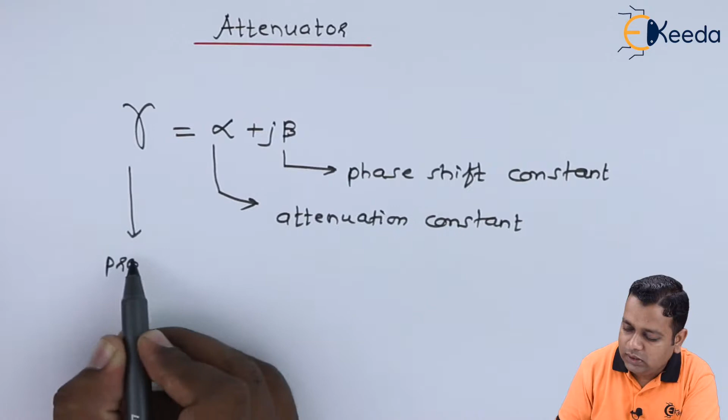These are basically beta, as in the previous topic we addressed with phase shifters. Beta accounts for the phase shift constant, whereas alpha accounts for the attenuation, and this is called the attenuation constant. So the attenuation and the phase shift together govern the propagation of the signal, this is called the complete propagation. Hence, gamma is called the propagation constant.

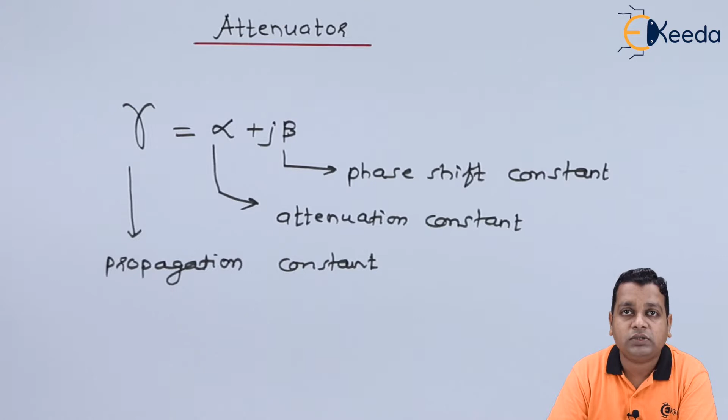Now we have the topic called attenuator. The attenuator is a microwave passive device which will attenuate the microwave signal propagating through it. The extent of attenuation can differ. It can be complete attenuation, so that we call the device a terminator. If the complete microwave power is absorbed by a certain resistive-type dielectric material, it acts as a terminator, and when a certain percentage of microwave power is attenuated, it is a general attenuator.

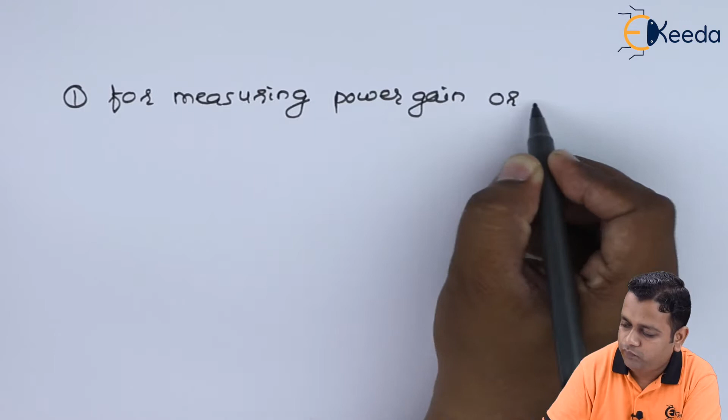Now there are different purposes to have attenuation in the microwave test bench. The first purpose is for the measurement of power gain or loss, most possibly in terms of decibels. The second intention to use attenuators is for providing isolation between the instruments or components.

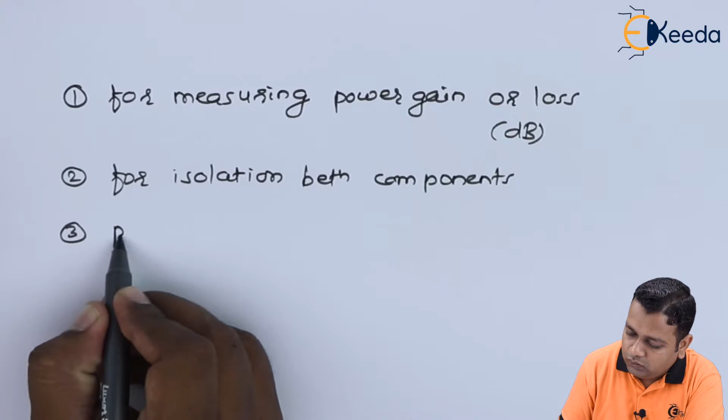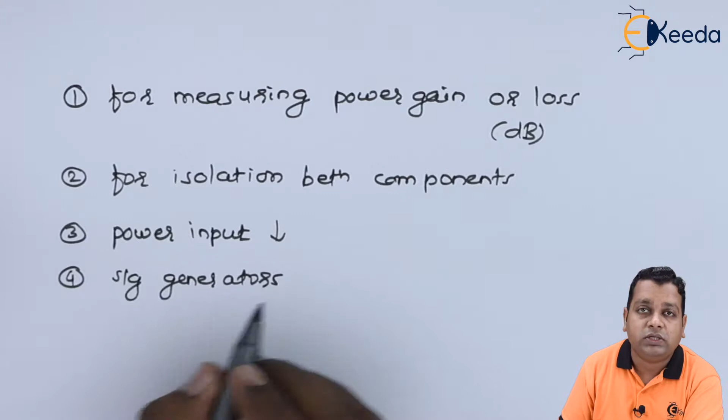The next purpose is for reducing the power input to the intended device, so the power input can be in a controlled manner with the help of the attenuator. And the fourth purpose is for signal generators. Signal generators are of two types: microwave tubes and microwave signal generation on semiconductor platforms using the negative resistance principle. With the help of the attenuator, signal generators are provided the means of calibration for their outputs at the accurate or precise level.

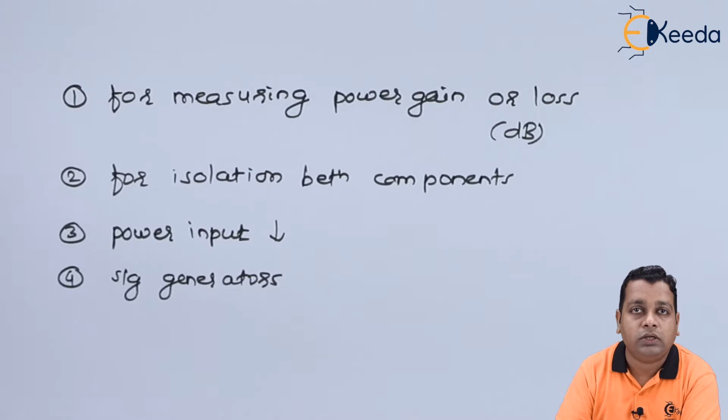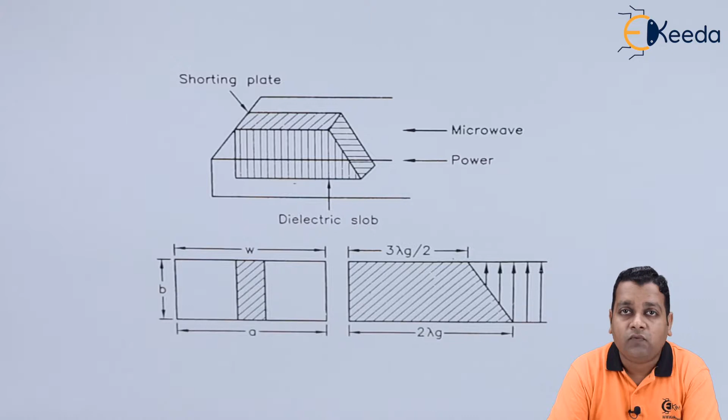So these are the intentions for using attenuators. Now, we discussed that there can be two types of attenuators. The fixed attenuators, in which the assembly has components at fixed positions, and a fixed percentage of microwave power can be absorbed, resulting in attenuation, a kind of loss in the power. On the other hand, if we can have a variable amount of power attenuated, the attenuator is called a variable attenuator. In this diagram we have the fixed attenuator.

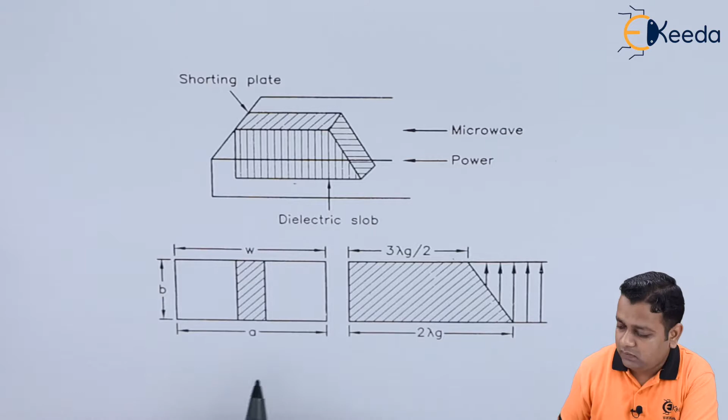The three-dimensional view of the fixed attenuator is shown in the uppermost diagram, where a section of rectangular waveguide is shown, and in the hollow space inside the rectangular cavity, we have a shorting plate at the end, and a dielectric slab which absorbs the microwave signal or microwave power coming from the other end. The dielectric slab exhibits pure resistive nature, which makes the absorption possible.

Now to look at the two sectional views here, if you see the front view, it will have this kind of visualization, where the dimensions of the rectangular cross section, small a for the broader and small b for the smaller, can be represented, and in between there will be a centrally placed dielectric slab, so that the power absorption can be made.

Now the rectangular waveguide cavity has not been completely filled up by the dielectric slab, but a certain space has been covered because of this dielectric slab. Hence we can say this is the fixed attenuator.

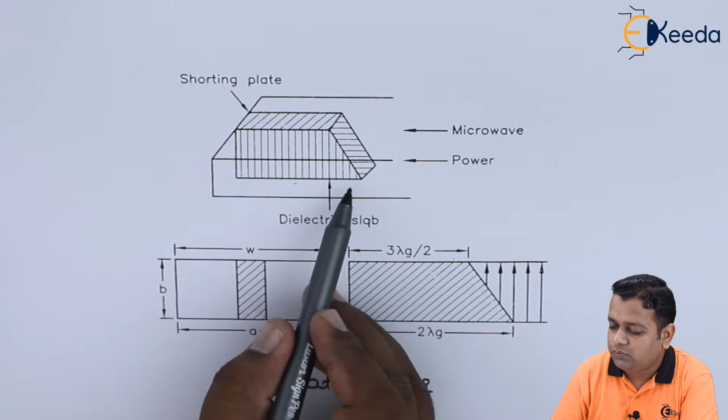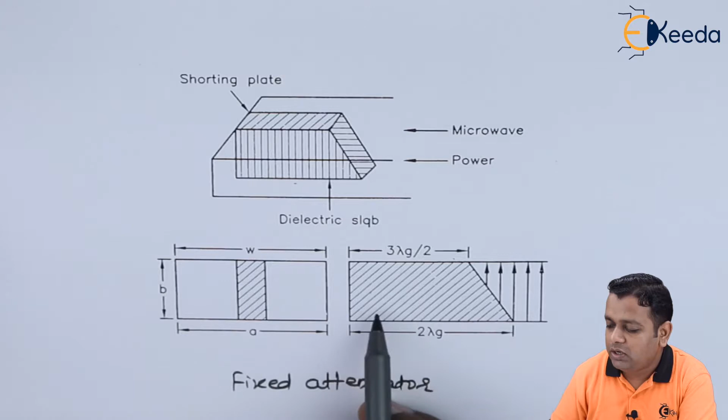To see the side view and this particular shape, the tapering is most possibly done so as to reduce the reflections. The side view will represent such a shaded dielectric slab, which has a shorting plate at the end.

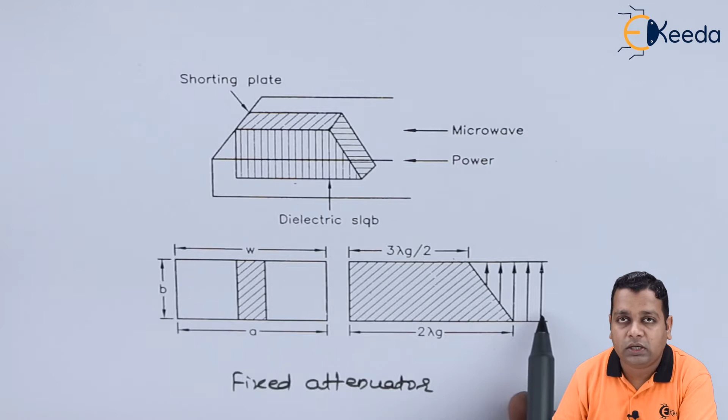Whenever the microwave signal is incident onto the dielectric slab in its particular journey, originally we have the orientation of the E field vector like this. So finally, going from bottom to the top end up to this dielectric slab, there will be vanishing of the E field vector, so the absorption of the microwave power can be made possible.

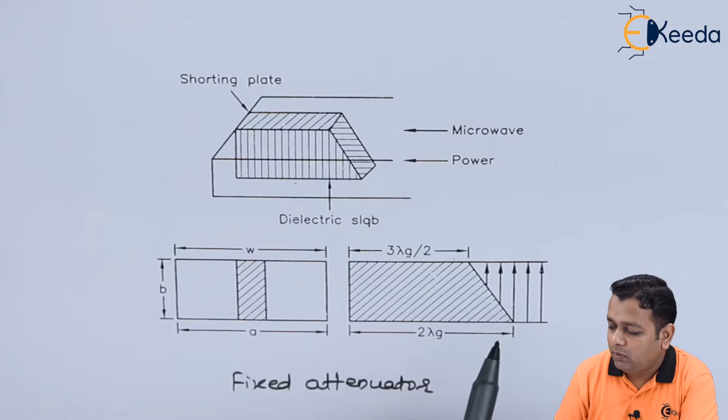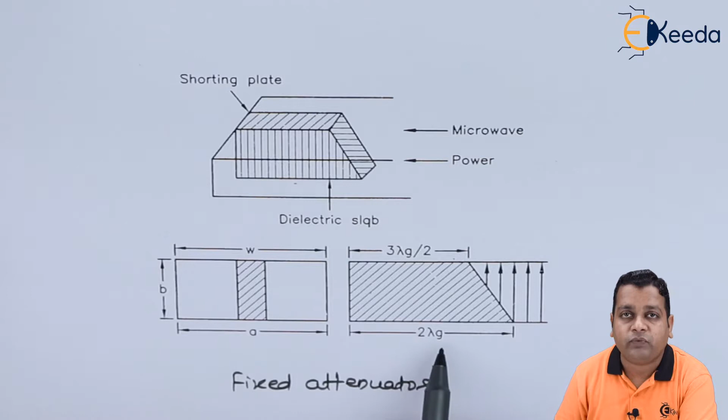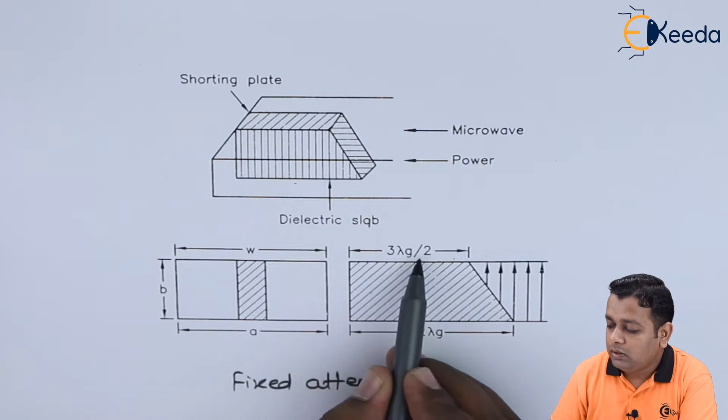To talk about the generalized dimensions, most possibly the bottom length of the dielectric slab is taken as twice lambda suffix g, where lambda suffix g is called the guide wavelength, whereas the top length of the dielectric slab is kept to the proportion of 3/2 times lambda suffix g, the guide wavelength.

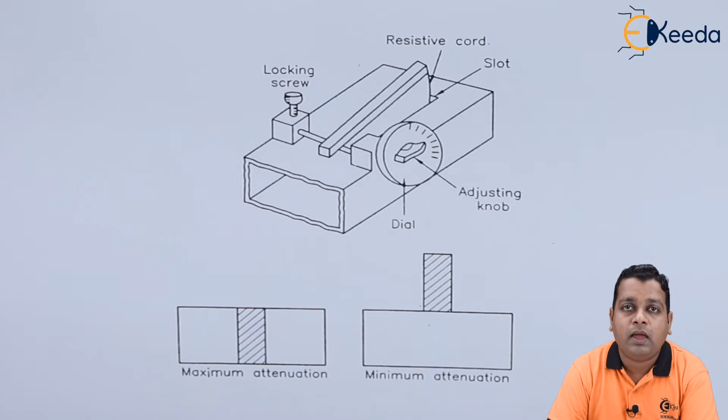So the earlier schematic diagram has given us information regarding the fixed amount of attenuation to be made. The assembly was such that the dielectric slab had a fixed dimension and was completely inside the waveguide cavity.

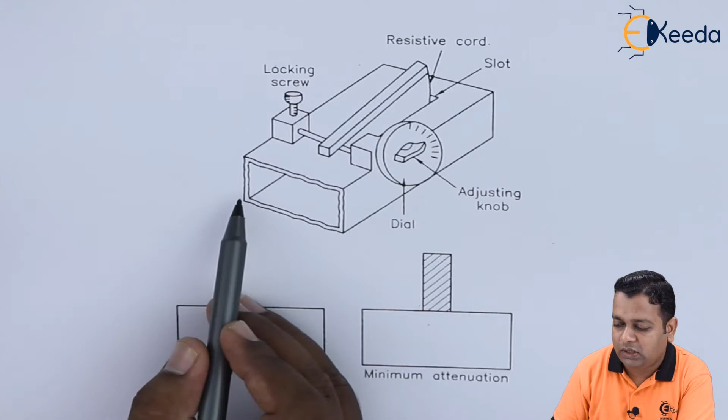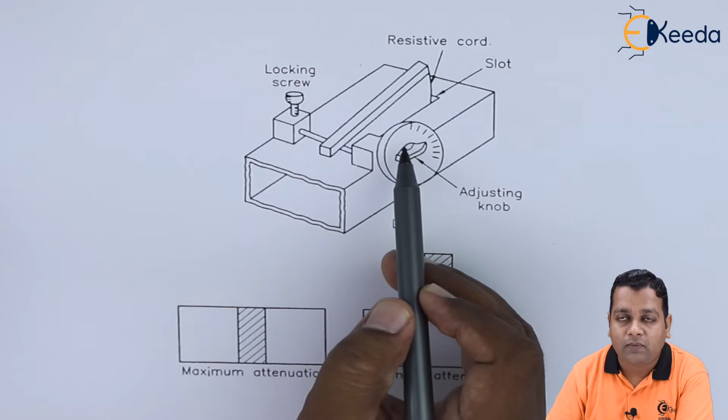Now in this particular diagram, you can see the rectangular cross section, and the assembly as we have seen in the case of the phase shifter, where we have a locking screw, the adjusting knob, and the dial for readings. Here it is not completely only a dielectric slab but a resistive cord that can be inserted inside the cavity space for the rectangular waveguide with the help of this slot. So such a type of attenuator is called a flap attenuator.

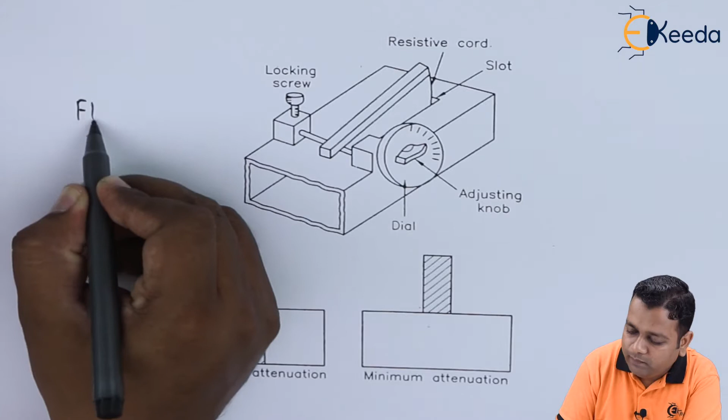So it is very simple to know, with the adjustment knob here we can have the resistive cord inside the cavity of the rectangular waveguide.

So this is the cross-sectional view where the complete insertion of the resistive cord up to the bottom wall of the rectangular waveguide is there, which will offer the maximum attenuation inside the transmission line, whereas if it has been completely outside the cavity with no insertion, at the zero reading of the knob we can say it will be the minimum attenuation.

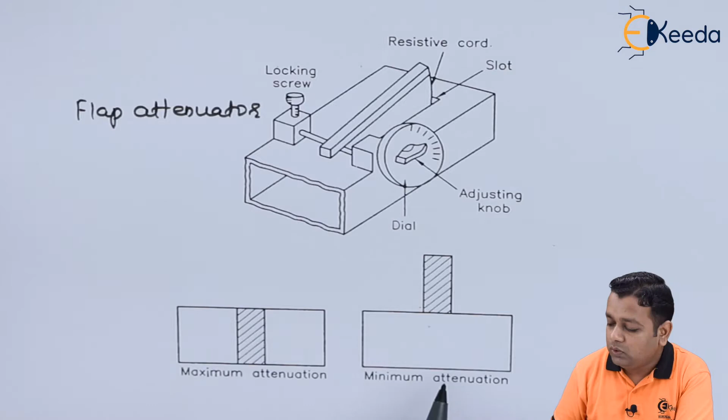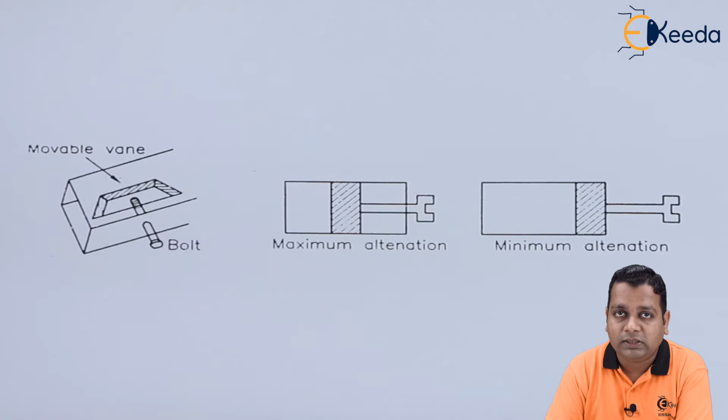So these are the two extreme conditions of use for this flap type of attenuator shown in the cross-sectional views. Now when we talk about the movement so that the dielectric slab or the resistive material absorbing the microwave signal can be adjusted to its particular position, we have this example.

So this example is of the movable vane attenuator.

So the three-dimensional view can be seen on the left hand side, where we have the movable vane at the center position represented here, which is connected to the assembly by the bolt. So by moving this particular bolt, we can shift the location of this movable vane inside the cavity of the rectangular waveguide, for example.

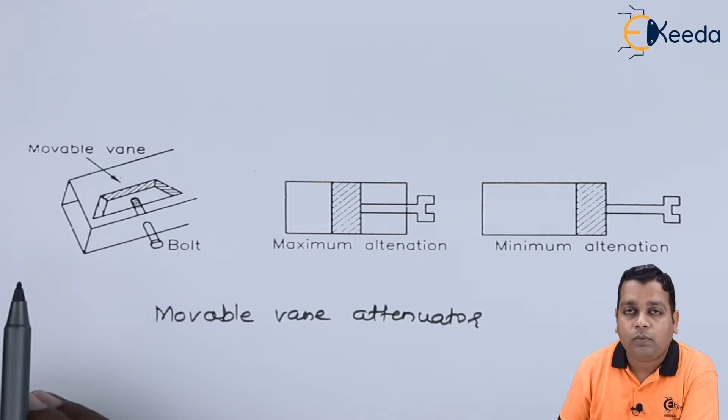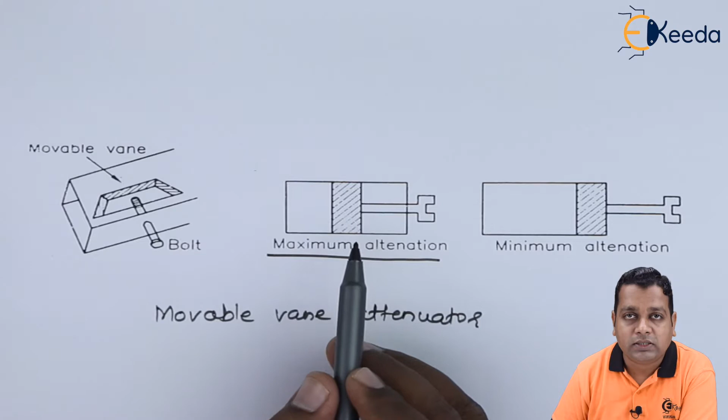So now in the second diagram, we have the maximum attenuation possible with the help of the knob or the bolt that has been completely shifted inside the waveguide cavity, so that this is the shaded portion for the resistive material at this particular position.

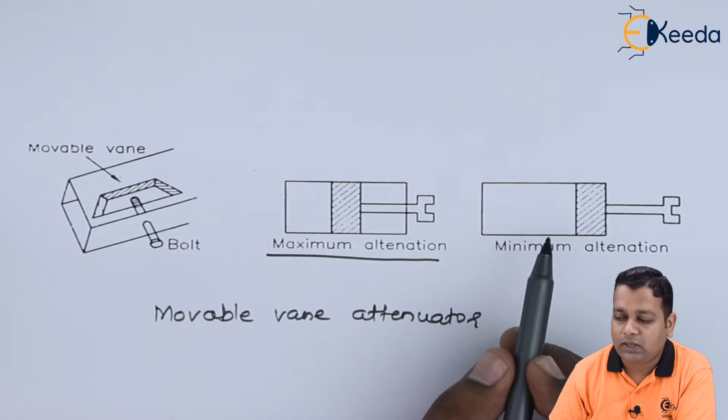Now when the bolt has been completely opened, the resistive material has been shifted to one side, so that the effective area of the cavity is changed, and it will offer the minimum kind of attenuation inside the rectangular waveguide, which is a transmission line.

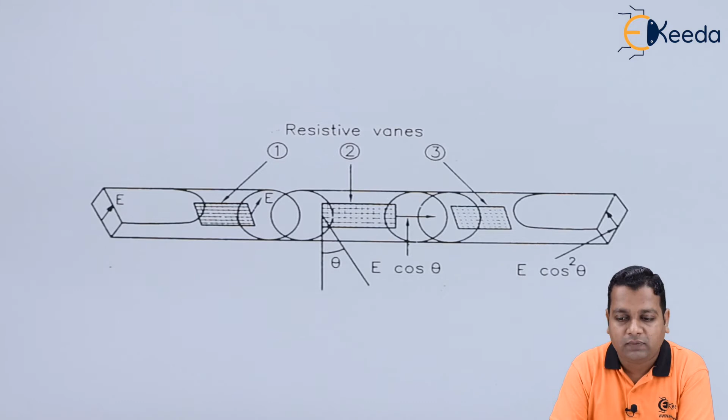Now both types of attenuators we have seen, the mechanical assemblies are associated with the variable type as well as the fixed type of attenuators. Few applications require precise changes in attenuation levels, so this is one example of it, the rotary vane precision attenuator.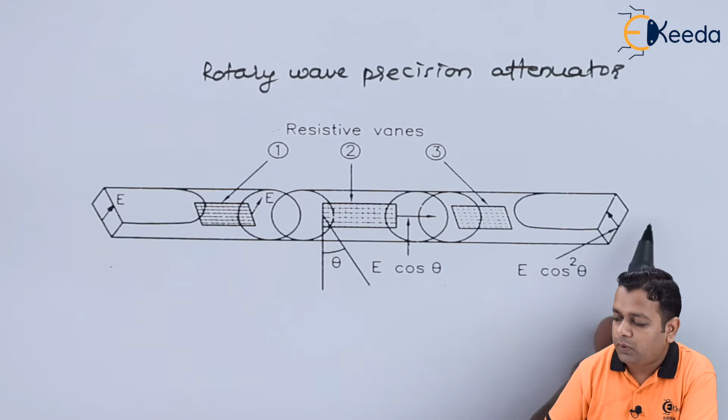In this attenuator, you can see on the left hand side as well as the right hand side, we have rectangular openings. This means it is the end of a rectangular waveguide, whereas at the middle portion we have circular openings, circular cross sections. So I can say that here it is a transition from the circular cross section to the rectangular one on both sides. At the center we have the circular waveguide, whereas at the ends we have the rectangular waveguides. Now we consider the propagation of the microwave signal with the dominant mode.

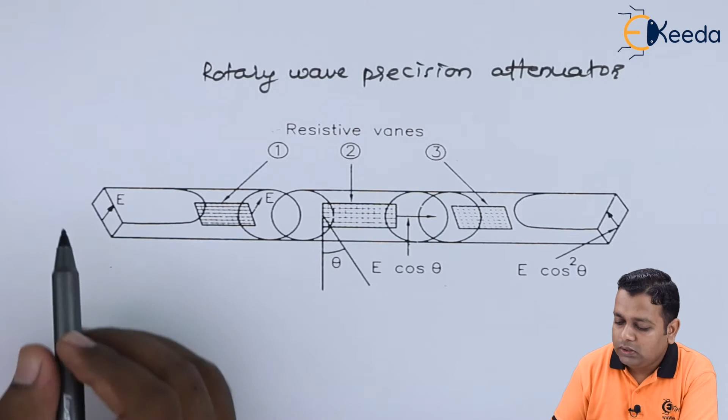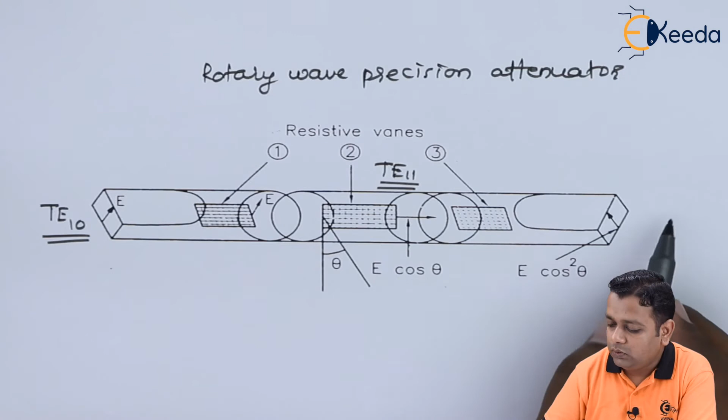For the rectangular openings, the dominant mode of wave propagation will be TE10, transverse electric, whereas for the circular ones we have the dominant mode represented by TE11. The dominant modes offer the least possible value of the cutoff frequency. So here also we shall be having the TE10 mode of wave propagation.

Now you can see here the three shaded portions represented. These are basically the resistive vanes. At point number 1, this is the resistive vane that has been aligned to the broader dimension of the rectangular waveguide, so it is in the horizontal plane here.

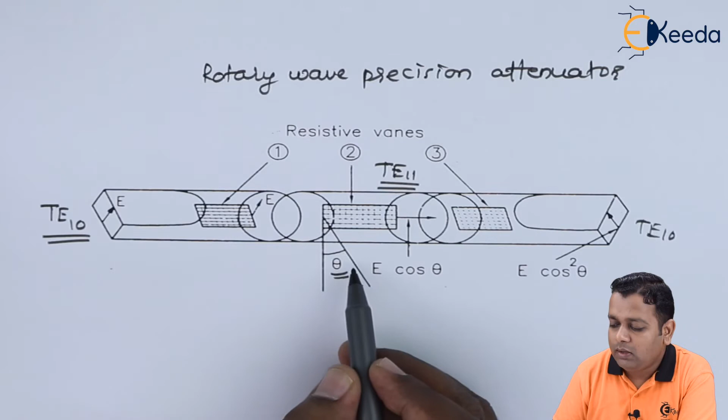In the third case, we have the vertical orientation of the resistive vane, which is like the vertical orientation of the E field vector shown for the TE10 mode of wave propagation in the rectangular waveguide. So the horizontal plane, the vertical plane, and the third one with the assembly for the second point denoted a rotary one, where a certain angle theta can be changed in the alignment of the resistive vane, so that we can have adjustment of the attenuation level at precise levels. Using these three, the precise value of attenuation can be obtained.

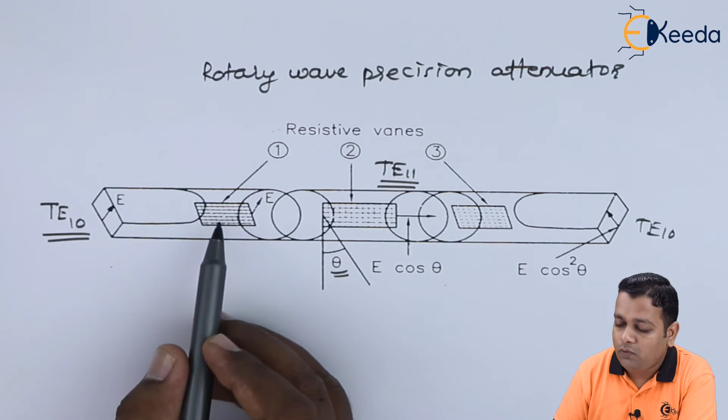If the resistive vane inside the cavity of the waveguide has a parallel orientation to the electric field vectors, it will completely absorb it. In the first case we find the electric field vertically oriented, whereas the vane is horizontally oriented, so it will not affect the flow of the microwave signal through it.

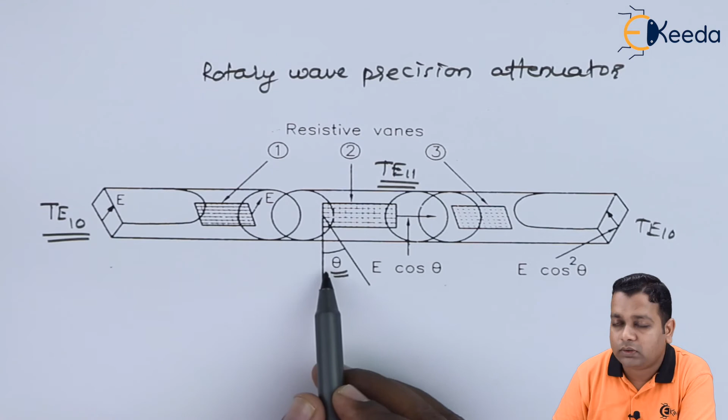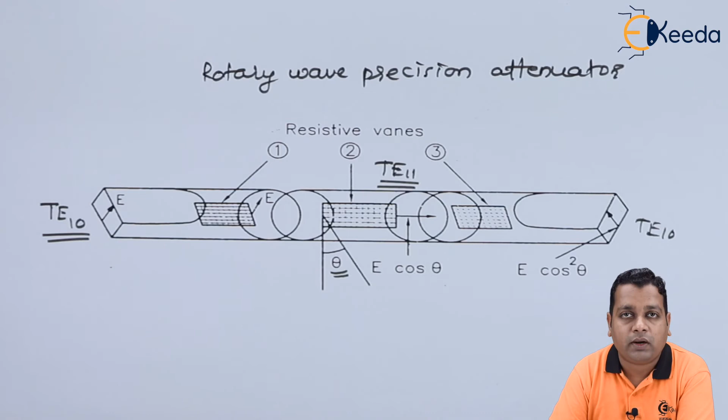In the third case, the resistive vane is also having vertical orientation, and the E field is also vertically oriented, so the vertically oriented component can be completely absorbed. Whereas at the middle, the effect of angle theta can resolve the component into E cos theta and E sin theta. So the corresponding trigonometric component of the E field vector can be attenuated with the help of this rotary type wave precision attenuator seen in this diagram.

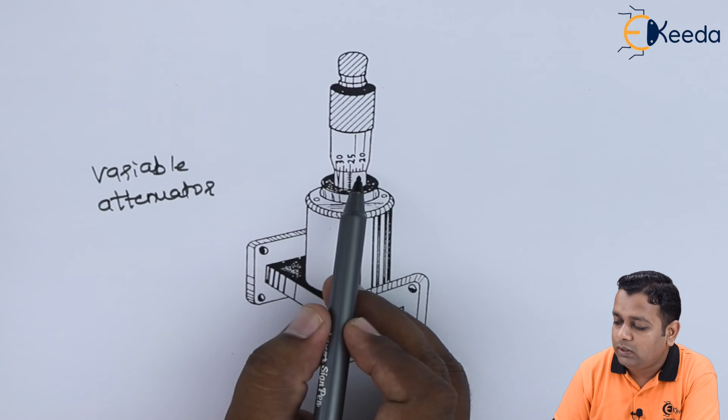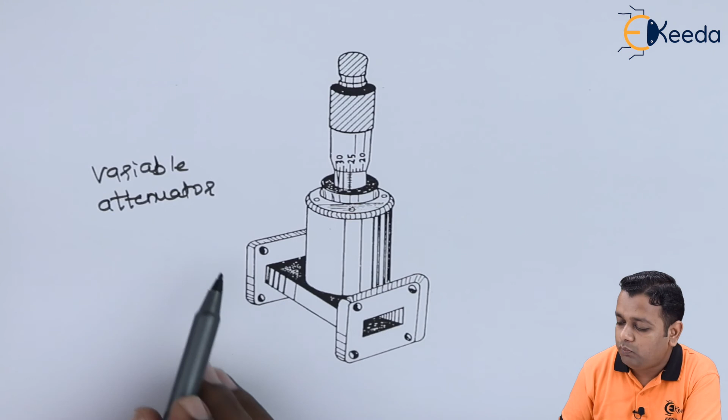Now in the practical setup, while performing experiments in microwave engineering, this is the schematic diagram showing the variable type attenuator. At the bottom we have a rectangular waveguide, and in between there is an assembly to insert some resistive material to a certain depth inside the rectangular cavity. For movement, a knob with markings on a circular scale is provided, so that we can adjust the depth of the resistive material at variable levels, attenuating the microwave signal flowing from port 1 to port 2, at variable values.

This completes our topic of attenuators as well as our chapter on microwave components. In the next lecture, we shall start with the next chapter in the subject, microwave engineering, which will be microwave measurements.